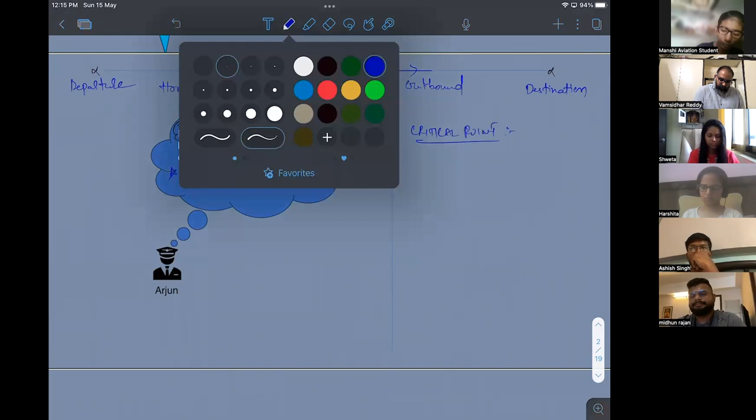So this Raghu gave him 2 documents to sign, one of them was about critical point. Let me explain what a critical point is. A critical point is a point between departure and destination. On the track, there will be a point - let's assume this is the point.

From here, if you continue your journey towards the destination, or if you decide to turn around and fly to your home or departure aerodrome, the time taken - let's say T1 and T2 - will be the same. So a critical point is a point on the track from which the time taken to go to the destination or departure will be the same, whether you go forward or backward. How many of you understood what a critical point is?

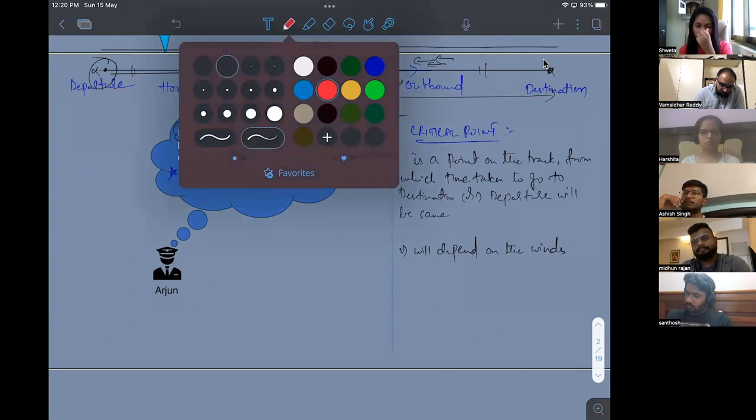So if I take here, let's assume the CP is here. If I assume CP is here, this is taking too much time, this is taking too less time. So CP cannot be on this side. So if I take CP here, this direction you are fast, but the distance is more. This direction you are slow because of headwinds, but the distance is less. So somewhere it will balance, and the CP is towards the destination.

How many of you understood this? Okay, here I have made a separate slide to make you understand this point, but most of you could answer this, but we will discuss it again. You may just note down.

CP is closer to destination if you are facing headwinds. Very good, guys, very good, you're doing excellent.

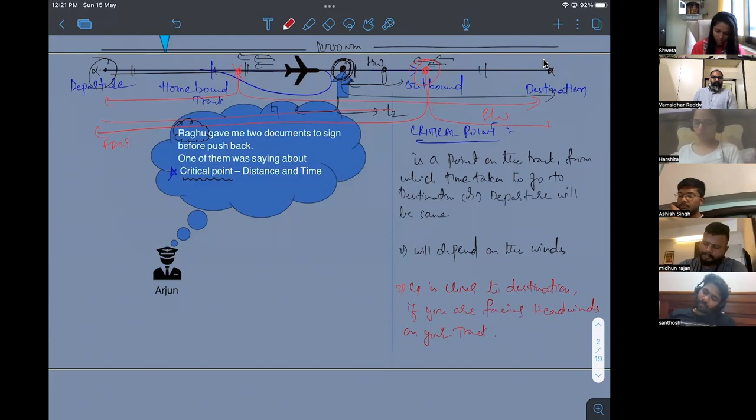Okay, now see, Raghu gave how many documents? Two documents. One document is CP. That means Raghu said, see here, if you are taking off from, let's say this is Chennai, correct? So after, let's say this is the CP. Let's say CP is at 600 nautical miles from Chennai.

That means he said here, if something happens like this, if you are before 600 nautical miles, you turn around, it will take less time to come to Chennai. But if you are beyond 600 nautical miles, you have to go and land in Colombo if you have to save time. Now tell me what happens if you are exactly at 600 nautical miles, where you have to go, whether you have to go to Chennai or Colombo.

Anyone? You can go anywhere. For example, your captain is having a heart attack, correct? Let's assume, yeah, Manshi, your voice is very slow. I mean, your internet connection is a problem. Be on mute. If you have anything, you please then unmute and ask.

Okay, fine. See, you can go anywhere. For example, in this case, let's assume Chennai has a hospital, but that hospital is very far from the airport, it is going to take a long time. But in Colombo, in your destination, the hospital is very near to the airport, correct? So if you are at 600 nautical miles, you decide to go to Colombo because of that other reason. Clear? It's up to you. Till here, any doubts you can ask me.

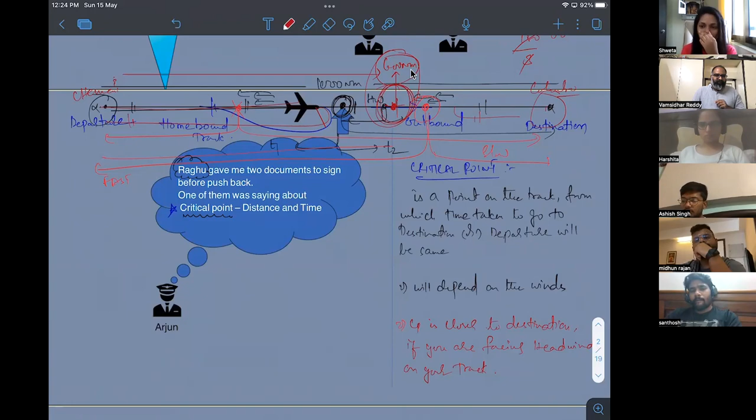See, let's assume this is your departure, or in this case, Chennai. This is your destination. I'll assume the total distance between departure and destination is capital D. Can I assume that? Okay, so there are winds today, I don't know how much. I'll assume my CP is here, critical point. Can I assume the distance between departure and the CP is small d? Now tell me, what is the distance between the CP and destination? Capital D minus small d. Very good.

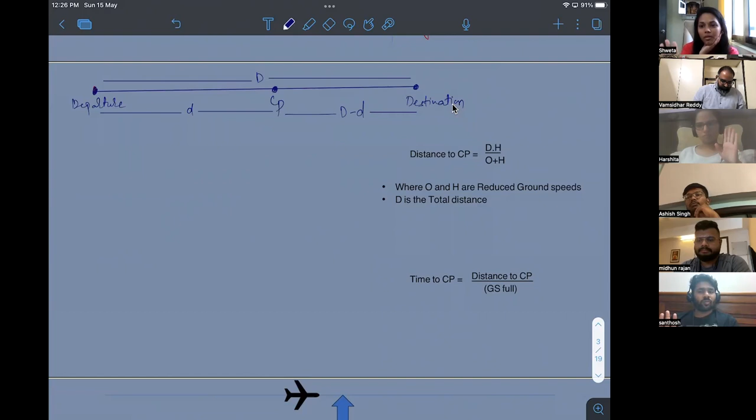Okay, now let me ask you one question. Think and answer. Guys who have attended instruments will answer anyway. Guys who have not attended instruments, you have to think and answer. How many of you know what is the difference between TAS and ground speed? How many of you don't know what is TAS and what is ground speed? Raise your hands. Okay, I'll go back. This is probably a new thing, because I have to explain what TAS is.

See, let's assume an aircraft is flying. It is flying from, let's say, Delhi to Hyderabad. Imagine there are no winds today, it means winds are calm. Now, as the aircraft moves forward, air molecules are being disturbed because of the wind blowing over the aircraft. Now, at some distance, there will be air molecules which are very much undisturbed because of the aircraft. Now, let's assume with respect to these air molecules, the aircraft is moving forward with, let's say, 100 knots, 100 nautical miles per hour. How many of you understood this?

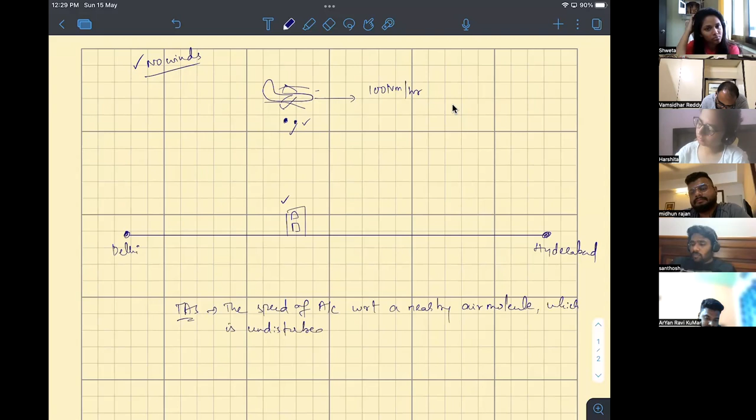Okay, now are these molecules moving today? No, because there are no winds, or nil winds. That means here, with respect to a building on the ground, what is the speed of the aircraft? 100 knots, or 100 nautical miles per hour. Because with respect to the building, these air molecules are not moving. How many of you understood till now? Okay, so TAS is nothing but the speed of the aircraft with respect to a nearby air molecule which is undisturbed due to aircraft movement. Am I clear on this? What is TAS?

Okay, now for example, today all the air is moving in the same direction as your aircraft with a speed of, let's say, 20 knots or 20 nautical miles per hour. That means, let's assume your TAS now is again 100 nautical miles per hour. That means with respect to this air molecule, your aircraft is moving forward with 100 nautical miles per hour. But all the air molecules are pushing you forward, or taking you forward, with a speed of 20 more nautical miles per hour. How many of you understood? Now tell me, with respect to this building on the ground, what is the speed of the aircraft? 120 nautical miles per hour. So in the first case scenario, when there were no winds, TAS was 100 nautical miles per hour. Now, in the first case itself, what was the ground speed? Equal to TAS, 100 nautical miles per hour. Very good. How many of you understood the nil wind scenario? TAS is equal to ground speed. Why? Because with respect to the ground, or a building on the ground, the air molecules are also stationary. Very simple.

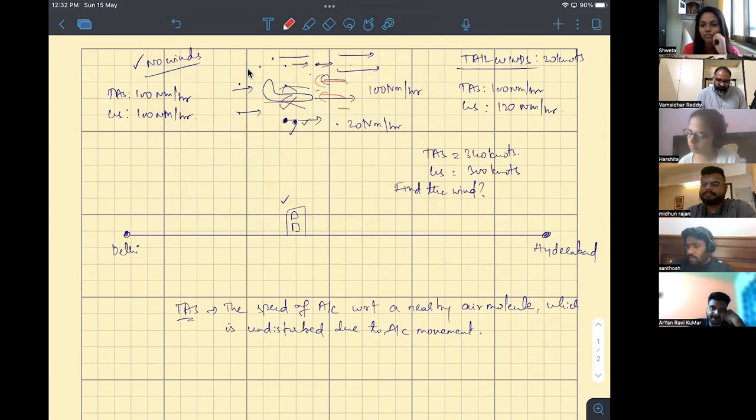Very good. You're trying to move forward, and the winds are trying to push you back. This is called headwind. So headwind of how much? 40 knots, because you're moving forward with 340, but the wind itself is taking you back with 40. That's why your ground speed was only 300.

Now listen carefully. Headwind will decrease your ground speed. So when I say today the winds are minus 20 knots, if you see this in the exam, you have to understand the wind speed is 20 knots and it is a headwind.

Understood? So headwinds are generally represented by minus, and tailwinds, let's say plus 30 knots. That means TAS is something and tailwinds are pushing you with an extra 30 knots, so your ground speed will increase. So tailwinds are generally represented by plus. Since DGCA question papers are sometimes copied from EASA or Oxford, they would have used this kind of symbols. So this is some kind of standard, to use minus for headwinds and plus for tailwinds.

Is this clear till now? Is there anyone in this room who doesn't know what TAS and ground speed are? Everybody understood? Okay.

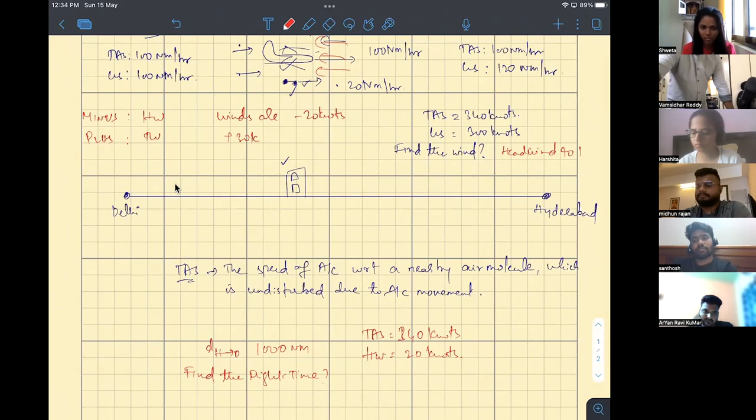3 hours, 7 minutes. I want exact answers. 3 hours, 7 minutes, 30 seconds. 3 hours, 7 minutes. So how did you calculate?

From ground speed. Okay, see, you're going from Hyderabad to Delhi, correct? Now let's say this is the ground. Here, when you are calculating time, are you traveling distance on ground, with respect to ground? Because from Hyderabad to Delhi, it is the ground distance you are covering. So that is the reason when you use distance equals speed into time, this speed is nothing but ground speed here.

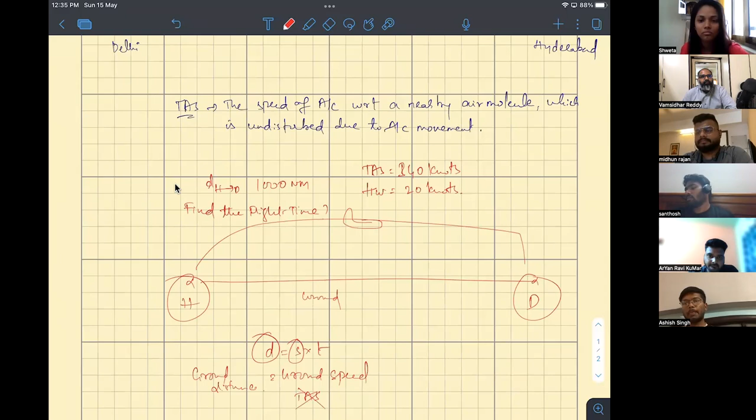Because you are inputting distance as ground distance, na? So never take TAS here unless they say nil winds. How many of you understood why you should not take TAS? Now when I teach instruments, I will teach you the same way.

There is TAS, there is indicated airspeed, there is calibrated airspeed, also called rectified airspeed. I'll teach what is equivalent airspeed. And any other airspeed here? CAS, TAS, IAS, EAS. That's all, na? So we will learn all these things in instruments. Today I have given you a taste of what is TAS and what is ground speed.

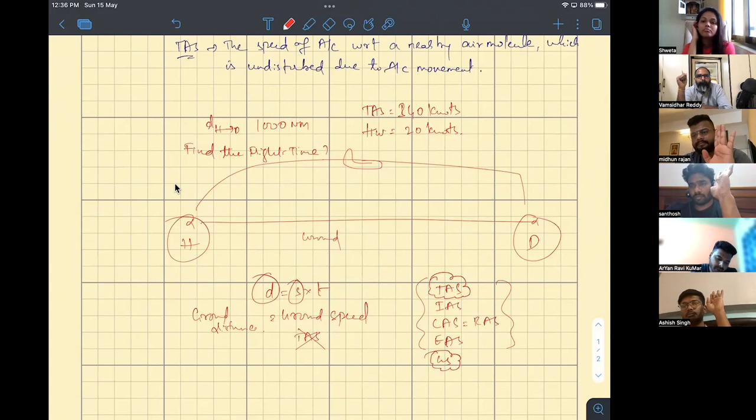How many of you are very clear of all the concepts till now? Shall I move forward? Good. Okay, now, see.

So, coming back, total distance between departure and destination is capital D. Your distance to CP I have taken as small d. So from CP to destination, it will be D minus d. Till here, everybody understood?

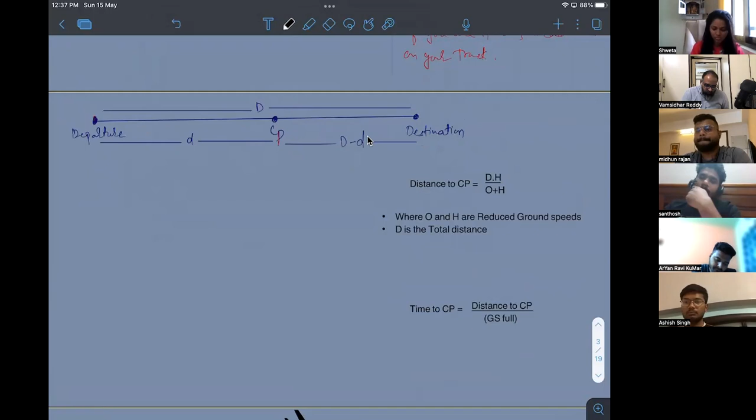Now, let's say my engine has, sorry, I have an emergency here. I have to land as soon as possible. I can go home or I can move forward to destination. So if I am at CP, the time to go back or go forward is the same. How many of you agree? That is the definition of CP. Now can I say T1 equals T2, time to go back?

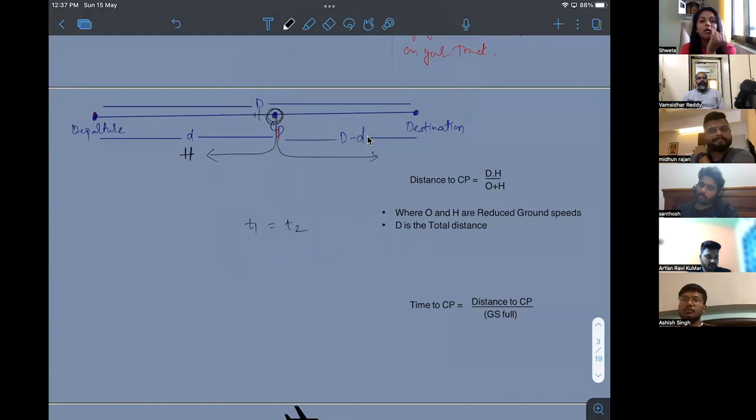Now see, the ground speed to go back, I'll represent this ground speed as H. H means home. How many of you understand? So H is ground speed home. I represent the speed of the aircraft with respect to ground, that is the ground speed of the aircraft when traveling to destination, or continuing like this, as O.

O is equals to outbound ground speed. This is called as homebound ground speed. Am I clear on this? O and H.

Correct. So T1 is equals to T2. What is the formula here? Distance is equals to speed by time. Correct? Speed into time.

Anybody doesn't know what is distance equal to speed into time? Raise your hands. No? Okay, distance equal to speed into time. Correct. Now what is time? Time is equal to distance by speed. How many of you understood it?

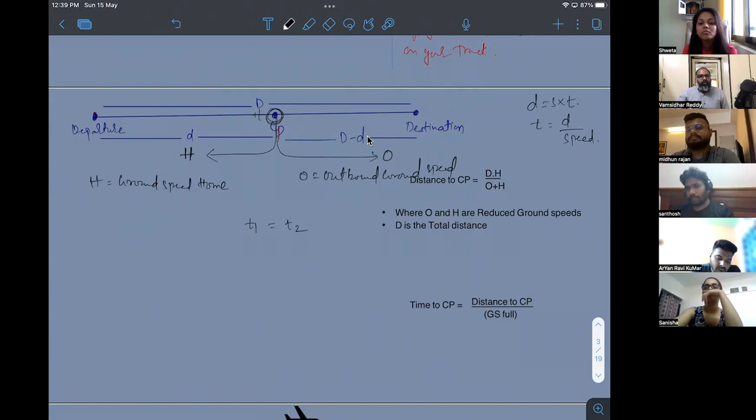Okay, now see. What is T1? D by H. Oh, there are two D's here, small d and capital D. Sir, small d by H. Correct. So this is the ground distance, small d, and this is your speed.

Okay, distance is equal to speed into time. So distance is small d, speed is homebound into T1, because I took this as T1 and this is T2. And T1 is equals to T2 because you are calculating from CP. So T1 is equals to small d by H.

Can I write small d by H here? Everybody? Yes, everybody. Fine. What is T2? Capital D minus small d by O. How many of you understood? Okay, so T2 is capital D minus small d by H.

H or O? Sir, O is said. So, clear? Now I'll solve this equation. Small d into O is equals to D into H minus small d into H.

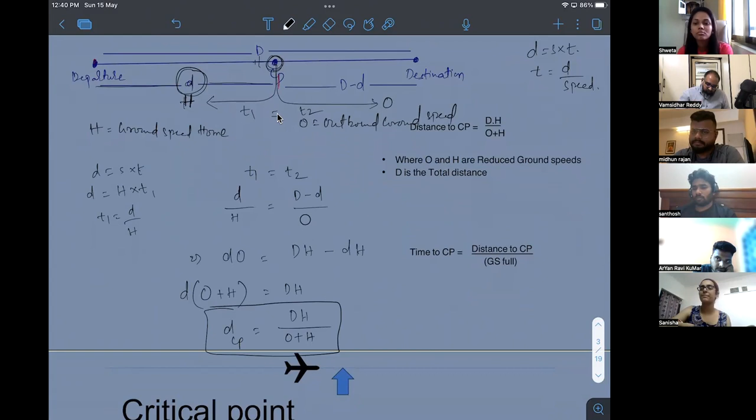Okay, now here, tell me, I was telling critical point from some time, correct? Tell me what is meant by critical. What is meant by critical?

Serious. Critical as in critical point from where you need to decide where to go. Who said serious? Sanisha, you said serious, no? Who said serious? Raise your hands. That means if I get angry, okay, you will say Vamshi sir is critical. Huh? Serious? What is this? Which school here? English teacher? I'll call her and say.

Fine. What is critical? See, critical means, for example, if you take my wife, she is a super specialist in critical care. She deals with patients on ventilators. She deals with every case where there can only be two outcomes. One, that case is going to expire, I mean the patient is going to die, or he or she gets relieved of the disease and goes home. For example, if you take a normal general medicine doctor, correct? So you go to his clinic, like everybody is going to go home, correct? Because it's an OPD clinic. But here it is like every case is critical. That means here there will be very less time to make sure the body doesn't go bad. Understood? So something which is very much related with time is given a name critical.

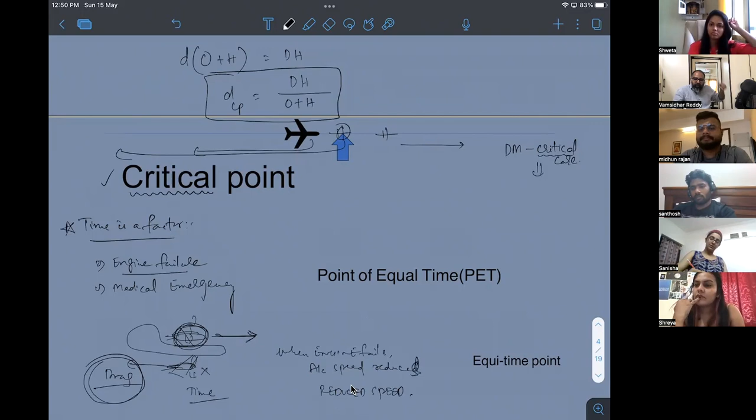Now see, I'm calculating the time taken to go to departure or destination. Not me, Raghu was calculating, he was the dispatcher, correct? So Raghu will assume here at this point, one engine is also going to fail.

So the pilot has to fly with only one engine. If two engine speed is, let's say 340, one engine speed would be around 280 knots. Now in this calculation, my engine has failed, I am going back home, or my engine has failed and I am going to destination. So when you are calculating CP, O and H, O comma H, which are ground speeds, outbound and homebound, these are reduced speeds.

So note down distance to CP. Solve this equation yourself, don't just see, note down DH by O plus H. Now in exam, do you have this much time to solve all this? No. From now on, even if I wake you up in sleep and ask distance to CP, DH by O plus H, O and H are reduced speeds, what is the distance between departure to destination? You have to memorize this, but you have to understand also.

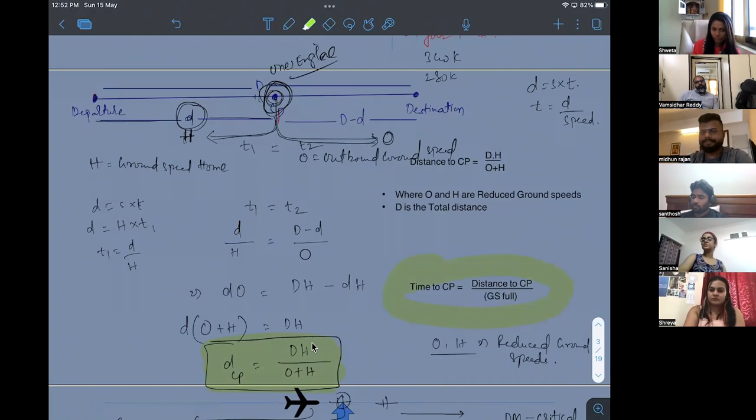Sir, can you explain the last line? When engine fails, outbound or homebound? Let's assume in the question they have given, which aircraft do you want to fly? Don't say Cessna, it has only one engine, if it fails you are going to land there. Which aircraft you want to fly? 737 or A380? A380, okay.

Let's assume A380 has a TAS of 400 knots. This TAS is produced if all engines are working, so this is 4 engine TAS. Now if there are nil winds, what is the ground speed? 400 knots, 4 engine. Yeah, so with 4 engines, it is 400 knots.

Now at a CP you have an emergency, your captain is also having a heart attack, and you want to go forward or back. Now your one engine fails. Let's say A380 with 3 engines will fly at only 350 knots. Now if there are nil winds, what is your ground speed? With 3 engines it's 350. Yeah, with 3 engines it is 350 knots.

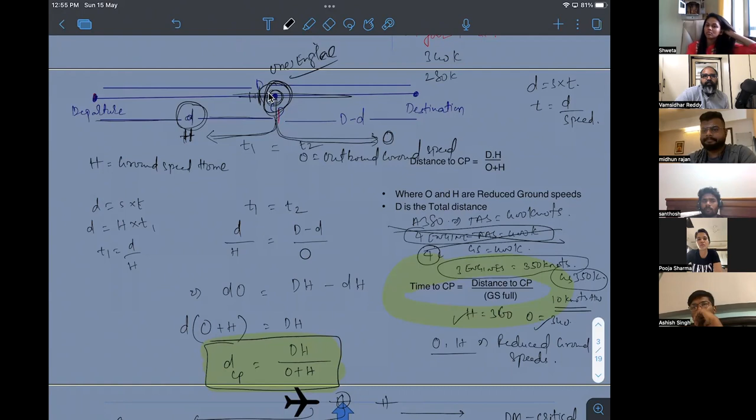No? Note it down, everyone.

Good. Now let's assume Raghu is sitting here.

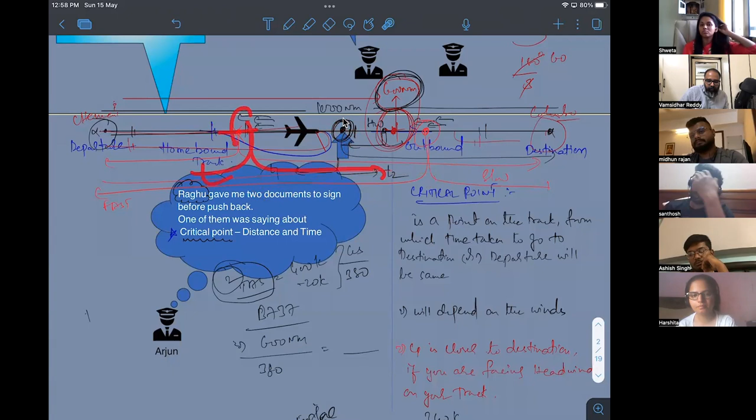See, you are still going to your CP, correct? Engine has not failed. You will assume engine fails once you reach your CP, or once you decide to come back or go forward because of an emergency. How many of you understood?

So that means while calculating time to CP, time to CP equals distance to CP by outbound speed, full ground speed. How many of you understood? Clear? Note down: time to CP is distance to CP by outbound full.

Okay, here there are other names also for CP. It is also called critical point, also called point of equal time. That means to go forward, also to go backwards, it will take equal time. That's why it is called point of equal time.

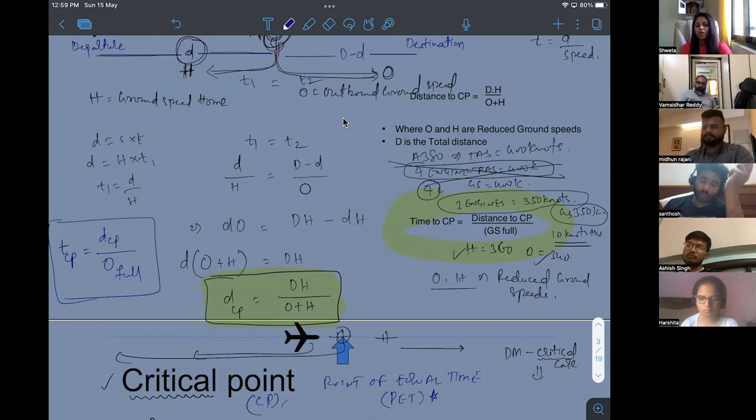From now on, I'll never call it critical point, I'll call it CP. Sometimes I use PET. In your exams also, you don't sometimes see CP, you see only PET. What is PET? Point of equitime, point of equal time. There is one more thing which you can rarely see in exams, that is equitime point.

All this means the same: critical point, CP, point of equal time, PET, or equitime point. Shall I move forward? Till now, any doubts you can ask.

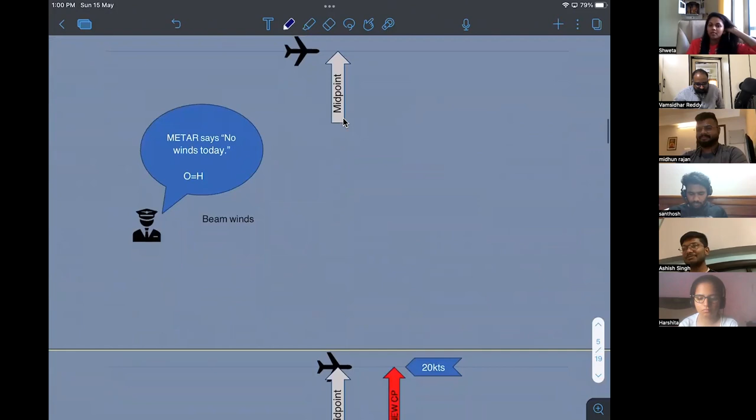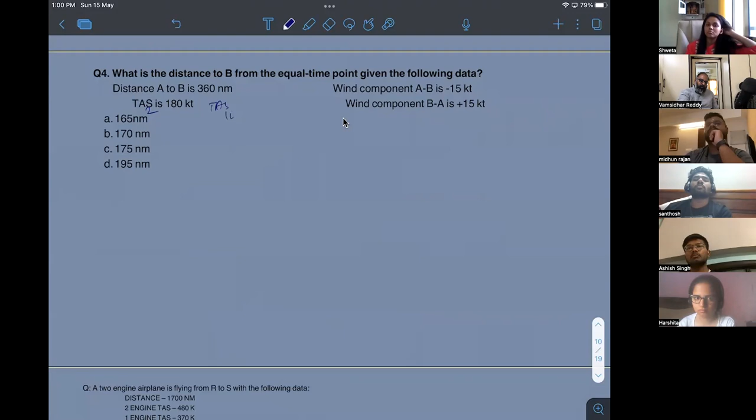Do this question. Okay, let me modify this question. This is TAS with 2 engines. If this is TAS with one engine failed, let's say this is single engine operating, let's say Boeing 737, that means one engine failed and only one single engine operating. Now TAS is like 150 knots. It is not a Boeing 737, TAS is very high for Boeing 737.

Your landing speeds are around 200. Let's say it's a small aircraft. Okay, now solve this question. You have 5 minutes.

How many students are there in class? Right? 1, 2, 3, 4, 5, 6. But officially we reached like 20 students on this batch. So 2 or 3 students will be joining from 2 or 3 days. Fine, I'll be back in 5 minutes. Until then, you calculate.

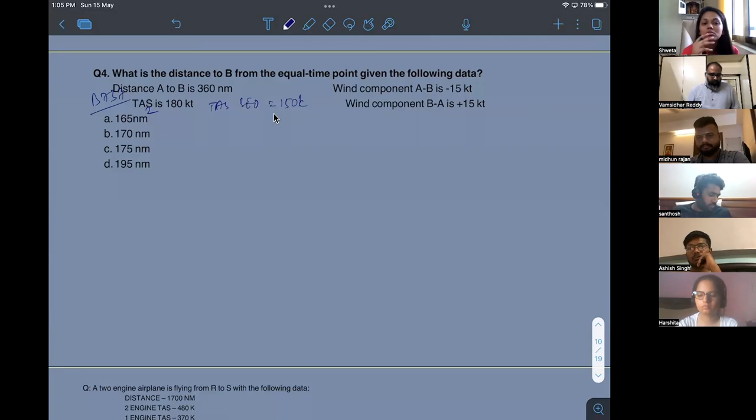Okay, because in exam I don't want you to confuse what is H, what is O. So always write down: you're going from A to B, correct? Write down where is A, where is B. That means A is your departure and B is your destination. Clear? Now the distance is 360 nautical miles.

360 nautical miles. Always write this down. Let's say this is your CP, put a dot for it. From here, if you're going home, this is your homebound speed; if going out, this is your outbound speed. Now, 2-engine TAS is 180, correct. 1-engine TAS is 150. So what is the formula for distance to CP?

DH by O plus H, where D is the total distance, which here is 360 nautical miles. What are O and H? They are reduced ground speeds. Outbound is... wait.

See, what is the TAS? TAS with 1 engine is what you have to consider now, which is 150. Your ground speed is TAS minus winds or TAS plus winds. If you're going outbound, let's calculate that first. Your TAS is 150, and the wind component A to B means you're going outbound. Is it headwind or tailwind? Headwind, minus. How much is it? 135.

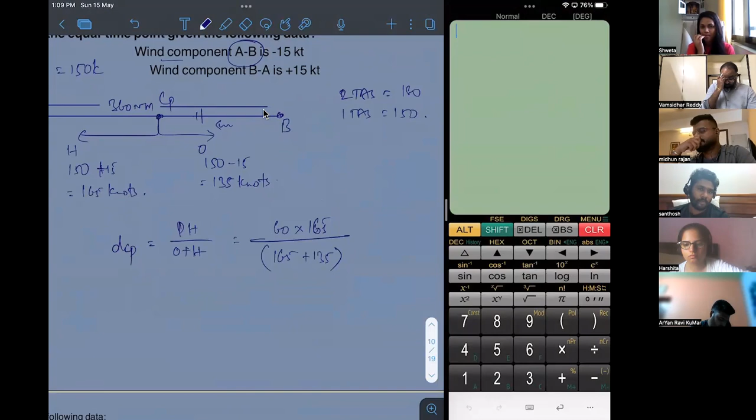This is how you have to enter this: calculate 60 into 165. Numerator 360 - wait, it's 360, correct? 360 into 165, okay clear?

165 is correct. No, actually it's like 135. No, H is 165, right? Now you are going home, correct? When you're going home, sorry, from B to A, it is tailwinds, H is 165.

So this is where the confusion happens sometimes - you enter O in place of H. That's why I want you to always write O for outbound, H for homebound, with 2 dashes like this. Clear? Shall I calculate this?

If you have to do this, 165 plus 135, then input all values and divide, it will take a lot of time. So I don't recommend it. Instead do 360 into 165 divided by - in the bottom there are 2 or 3 values, correct? So open a bracket always, add 165 plus 135, and close bracket. Everybody input the same value or same method into your calculator.

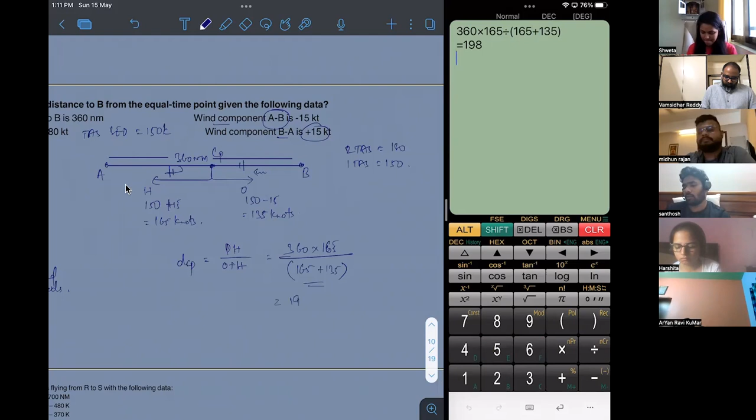How many of you got the same answer as I got? Raise your hands. Okay, everyone is raising their hand. How many did not get the same answer? Everybody got it? Good.

Now calculate time to CP. So, 1 hour 12 minutes. One hour 6 minutes - what is this? Two different answers: 1 hour 6 minutes, 1 hour 12 minutes. One is wrong, someone is wrong.

Ravi Kumar, how did you calculate? What is time to CP? Distance to CP by O full. Like I calculated, distance to CP is 198 nautical miles. What is O full? Is it full TAS with 2 engines? I'll kill you, I'll kill you with my pencil.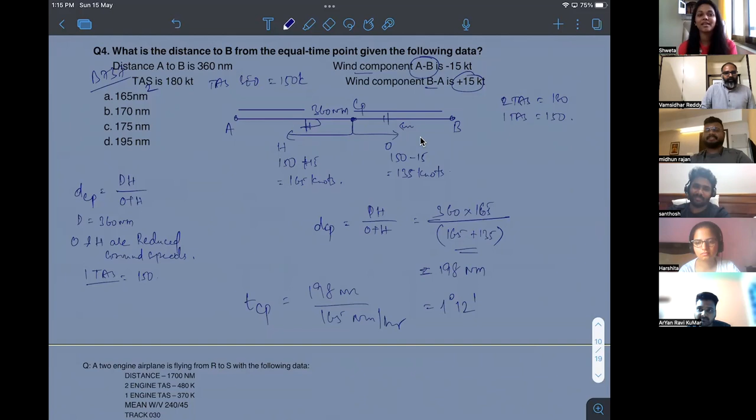So I was noting it down. Oh okay, please, I'm sharing. One second. Everyone.

How many of you know this song? No? It's a very good song here. Fine guys, come back here. Fast, oh always late. Anyway, until others come, we'll complete the song.

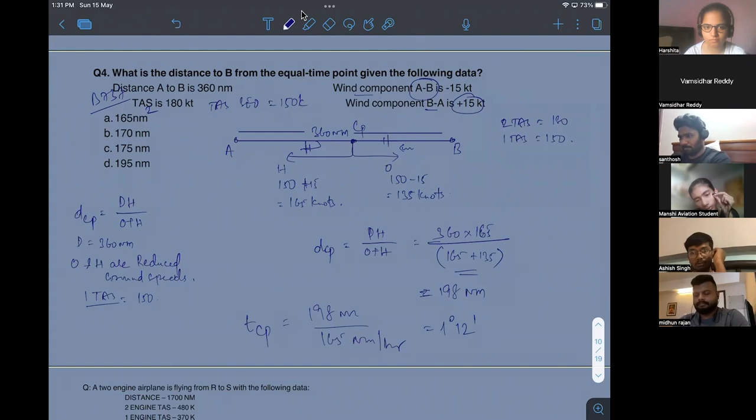Okay, so I said 1:30, correct? Now you just know how Raghu calculated, sitting on the ground, how much time it will take for the aircraft to reach the CP, and how much distance or where is the CP on the way. Clear? Shall we move forward with this discussion? Correct.

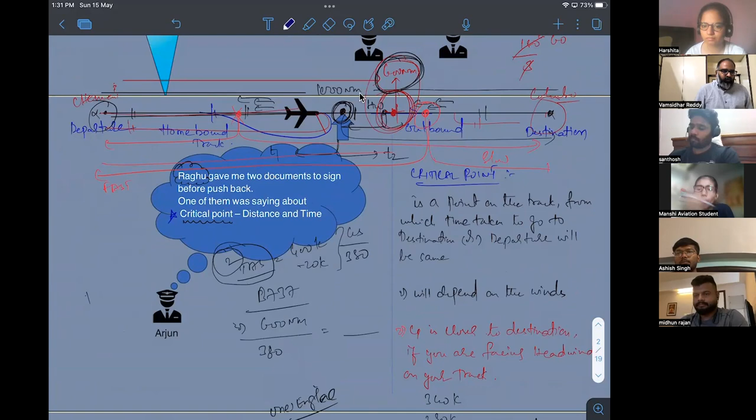Okay, see, on that day Raghu thought there are no winds. Okay, so he saw a METAR, correct? So Raghu is the dispatcher, correct? When he was calculating the DCP, distance to CP, the METAR said 0 winds. If there are no winds, where is the CP on this line? This is at the midpoint - yeah, departure, and this is the destination.

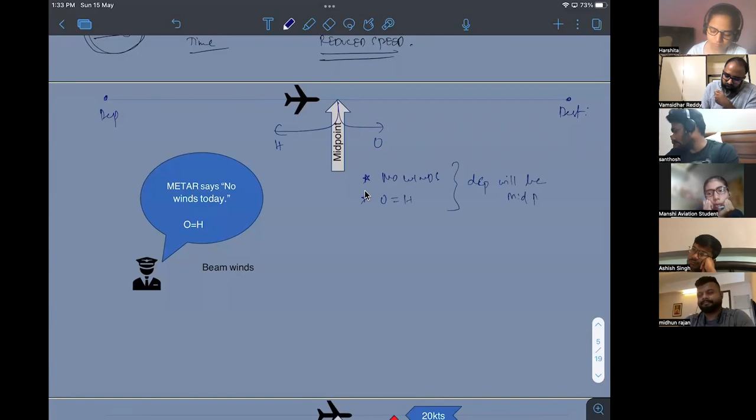So if there are no winds, why is it at the midpoint? Because your homebound speed and your outbound speed will be equal. That is nothing but your ground speed. Correct? Clear? So if they say no winds, or if they say O equals H, the distance to CP will be at the midpoint. How many of you understood this? Raise your hands.

What are beam winds? Crosswind, which are 90 degrees to the aircraft. So beam winds are nothing but if the winds are coming exactly from 90 degrees to the aircraft track or path. They can come like that, or they can come like this also from this direction. But they have to come from 90 degrees to the track.

Correct, so sometimes you see 'beam winds' or 'abeam winds' - both are same, no difference. Clear? Beam or abeam, the words are same.

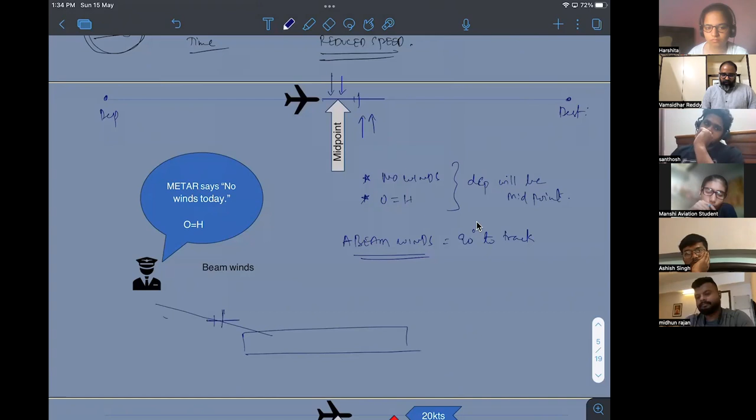Okay, tell me, is there any difference between beam winds and crosswinds? Yeah, there is a lot of difference. See, crosswinds are, for example, if you are trying to land on this runway, you will come like this. Now, if the wind is coming like this, one wind component is giving you a headwind, another component is giving you a crosswind. A crosswind is generally used for landings when the wind tries to push you out of the runway like this.

Okay, so here you don't use abeam winds because the wind is not exactly coming abeam to you. It is coming at an angle where one component is like a beam, and these are generally used for landings - this is a crosswind. But if you say beam or abeam, it means they are exactly 90 degrees to your track.

For example, if your track is, let's say, 045 degrees, tell me from where the abeam winds come. This is your track, your aircraft is flying 045, means from north. Okay, if this is north, you're flying on a track of 045. From where will the winds be abeam? What is meant by abeam winds? 135 - very good, 135 degrees.

So if the wind is coming from 135, that will be abeam winds. And this side also - 215... 315, sorry, 315. Clear. Very good.

Tell me, guess what happens to distance to CP in abeam winds? Winds are exactly coming, will it stay like that, sir? Will it stay at midpoint or will it move? At the midpoint only. Okay, so he says it will be at the midpoint.

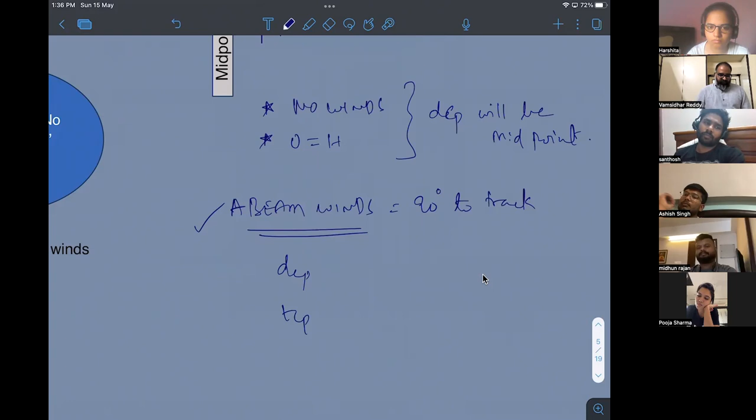Okay, that I understand. But how can you say the CP will lie at the same place, at the same midpoint? Why? But as we discussed earlier, CP will concern with only head and tail. Sir, we are maintaining the same track by crabbing into the winds.

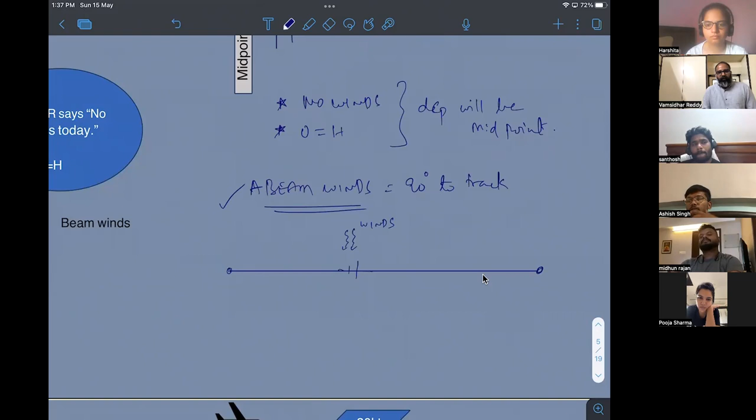I'll tell you. See, if you're flying like this, let's assume from here the wind is coming. These are abeam winds. Understood? Now what happens to the aircraft? If you maintain, let's say this track is going east, or the track is 090, correct? If you maintain your heading also 090, correct? That means your nose is exactly 090.

Because of this wind, your aircraft will be pushed sideways. So your final track will not be 090. Probably it will be 10 degrees to the right, so 100 degrees. How many of you understood why the aircraft is moving forward?

Now, here, see, if you're flying from Hyderabad to Delhi, you don't want to land in Kolkata. Correct? You want to go to Delhi only. What do you do? Instead of flying like this, you do something called crabbing into the winds.

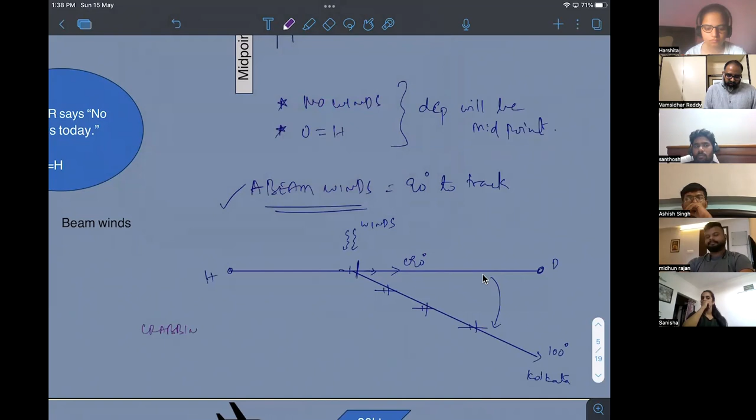Here, what is crabbing into winds? Instead of putting your nose like this at 090, you crab into the winds like this. If you don't do anything, you are drifting off by 10 degrees due to winds. Correct? Instead of putting 090 degrees, you put 080 degrees. That means you put your nose into the winds. Correct? So you're trying to fly like this, but the winds are pushing you like this. So ultimately, you will still be on the track.

Now, can someone say what is the disadvantage of this? See, your track is in this direction. Your aircraft is trying to move in this direction. Now the wind is coming like this and trying to stop you and push you towards the track. Correct. So that means your ground speed will be less.

How many of you understood why ground speed will be less? Raise hands. How many of you did not understand why ground speed is less? Ask. Anyone? Sir, once again. Okay.

Anil, if there are no winds, okay, the aircraft is moving forward with a TAS of, let's say, 100 knots. Clear? Now, what is the ground speed? 100 knots.

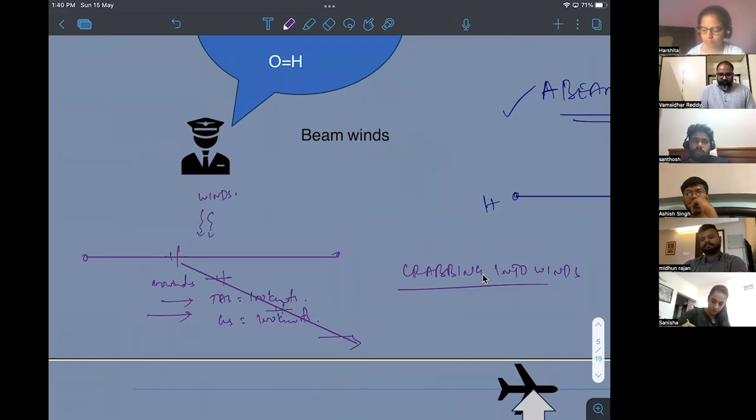Now, the winds are abeam. There are winds, correct? If they are, let's say, making your aircraft drift off like this, to prevent this drifting, you're crabbing into the winds. That means you put your nose like this. If the drift is, let's say, 15 degrees, you crab into the winds by 15 degrees. So you are trying to fly in this direction with a speed of 100 knots. Am I clear on it?

But what is happening? See, you're fighting with the winds and winds are pushing you like this. You're maintaining the track, but your speed is 100 knots in this direction only, not in this direction. In this direction it is probably 100 cos theta, cos 15 or sin 15, something like that. Understood? That means here your speed on the actual ground will decrease. Okay. How many of you understood this?

Here, everybody here attended CX3 class. Okay. Yes, sir. Okay, fine. First scenario, no winds, TAS is 100. How many of you agree?

Okay. So second scenario, your track is 090 degrees true. Your winds, here, where are the winds coming from? North, correct? So let's say it is 360. Winds are coming from north at 15 knots. Okay, your ground speed, you don't know.

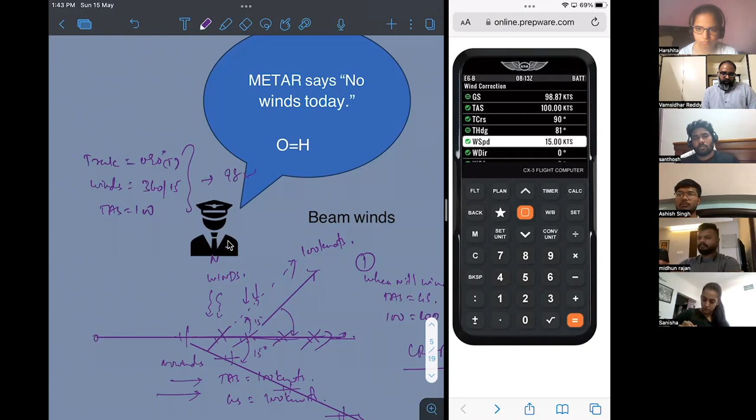The wind correction. So your TAS is 100. Now you are going on a true course of 090. The wind is coming from 360, the wind speed is 15. Wind direction is 0. Okay. So your ground speed is 98, so in this case, 98 nautical miles per hour.

How many of you understood this? That means, see, your ground speed from nil winds was 100, but now your ground speed has decreased because of beam winds. Till here it is clear.

Assume you're going from departure to destination. And if no winds, your CP was here. Now there are beam winds like this.

Now imagine something happened and you have to go back or forward. If you're going forward, you're doing this, agree? If you're going backwards also, see, because the winds are there, you're crabbing into the winds.

How many of you understood? So that means here your speed O is decreasing by something, H is decreasing by something, but both are decreasing equally. So that is the reason your CP will still be in the midpoint in abeam winds.

So in abeam winds, no winds and O equals H, CP will still be at midpoint.

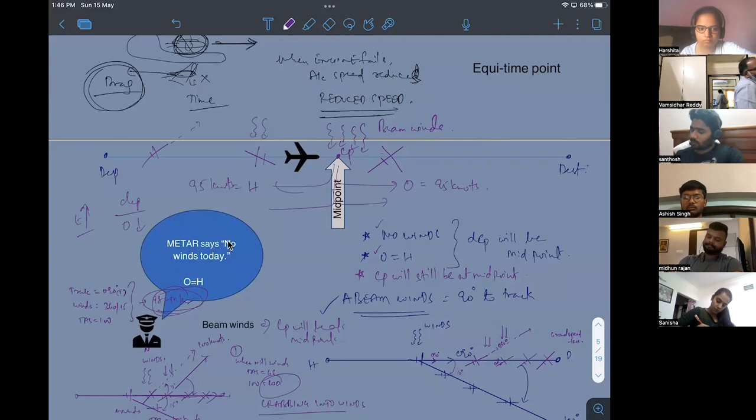It will increase because your ground speed is decreasing. Time to CP is nothing but distance to CP by outbound speed. So outbound speed is decreasing because you're crabbing into the winds, so time will increase. Right, so in beam winds, CP will be at the midpoint, but time to CP will increase.

Any doubts till now? I'm willing to explain it again. No doubts? You see, there is one paper - DGCA has around 9 or 10 question papers for navigation. There is one paper where CP PNR questions are very tough, around 15 questions in that same paper. And whenever students get that paper, they say sir it is very hard. So that's the reason I'm trying to push everything into your brain very carefully. If you have any doubt, if you don't understand a concept, please ask me now. Am I clear? So if you don't read or someone doesn't teach you with this clarity, and if that paper comes, you are going to fail.

Sir, you told beam and abeam are same, right? Yeah. Sometimes you are using abeam and beam, so I got a little confused, I wrote beam and I wrote A. Beam and abeam are same.

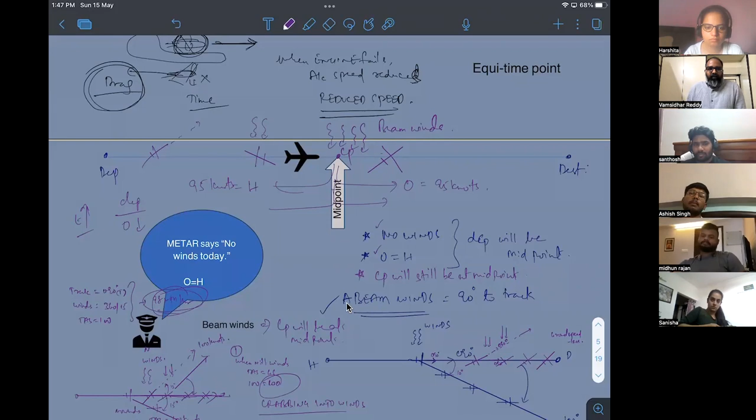What did you say? CP will be at midpoint and distance to CP will increase. Time to CP will increase. Time, yeah? Time is increasing.

So you're done with your sortie? No sir, I didn't have a sortie. They just called me to sign in some bond, I don't know.

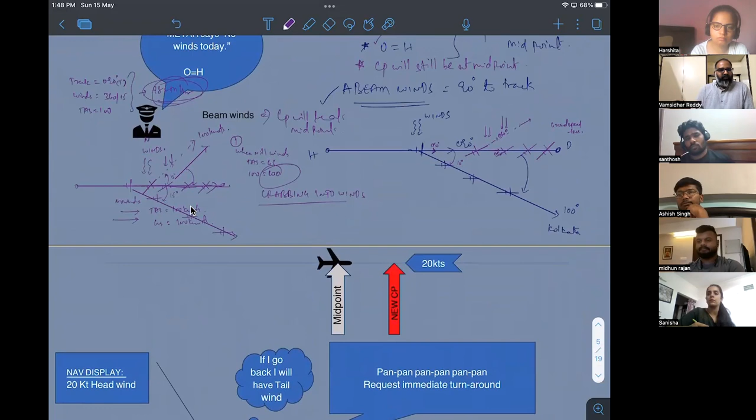Now, when he was discussing with Raghu, Raghu said there are no winds today sir, you enjoy. Aram se go and fly. But his navigation display on the cockpit is showing that I have 20 knots headwind now. So this is the midpoint. Now where is the new CP?

Is it here or is it here? Towards the red arrow, towards the right, destination. Can someone explain why? I want you guys to explain me why.

Your answer is correct. Sir, at the point of CP, we have equal time, T1 equals T2. When we get headwinds, time from our departure to our CP point, it may take more because speed is decreased now since we are getting headwind.

Good, time increases. So here, if you're turning back, you have a tailwind. If you're going forward, you have a headwind. So this time will be more when compared to this time - this time will be less, this time will be more. But our definition is time should be same. If you take here, in this direction, you are going fast, but your distance is more. So time to CP is distance by speed.

Your speed, but distance is more. Here, your distance is less, but speed is also less because of headwind, if you're going in this direction. So both ratios will be same and your CP will be here. New CP will be here.

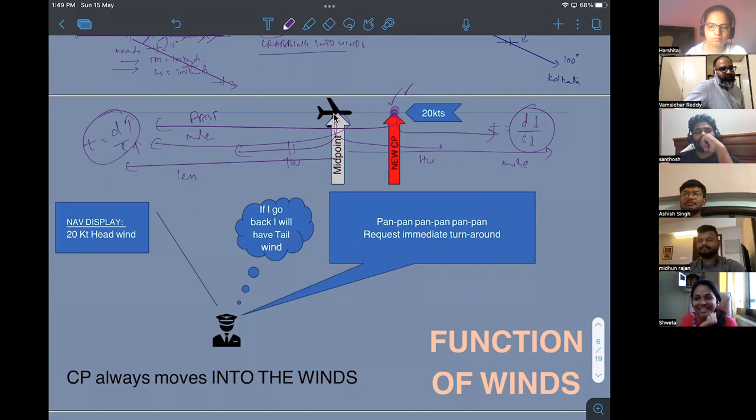To be frank, Arjun is my son, I created this story. Raghu is my best friend, I made him the dispatcher.

So I waited at the Chandigarh airport. A pilot really came out after 6 hours of waiting. I remember back then I was very financially tight. He said, I don't think you will be able to complete with the money you have, this will not be sufficient. He just gave me like 30 or 40 seconds, looked at this like that, and left.

That's the real story, but I believe you understood everything. I don't remember the pilot's name that day. Anyway, despite all that, I'm here. Story has a good ending here, if not, the story did not complete, story abhi baki hai. What was the movie name here? Om Shanti Om. So nice. This thing, clear? Mine, in this life only I'm doing it.

Fine, so he said on the RT, pan, request immediate turnaround, I'm coming back to Chennai. And you gave the pan. Clear? How many of you understood till now?

Now from this, can I say CP always moves into the wind? Yes, correct. So CP always moves into the winds.

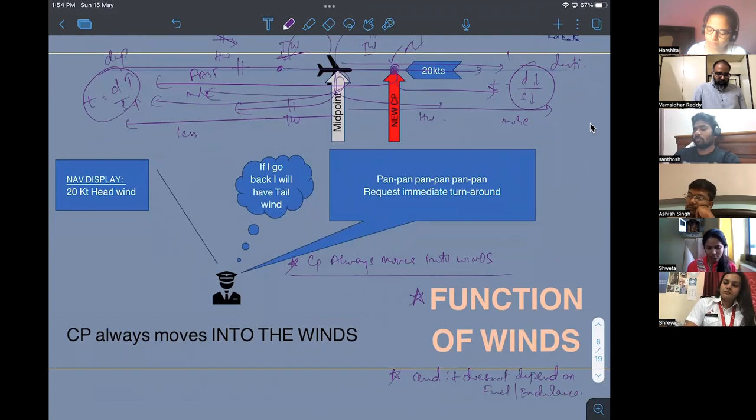Do this question. No, these concepts are beautiful here, I really love teaching these concepts.

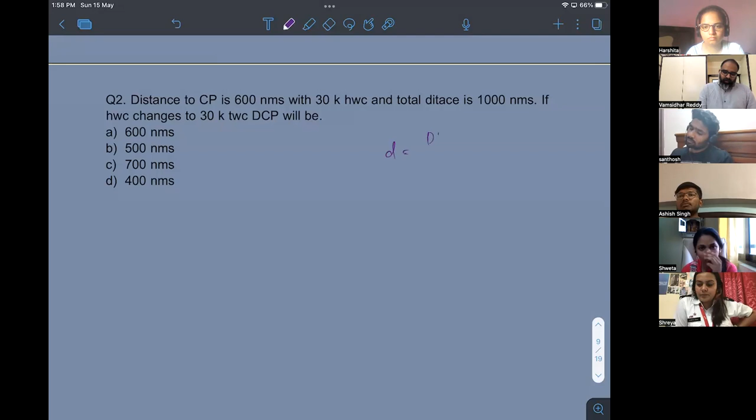Okay, we are not doing algebra, we are pilots, we don't know any mathematics, we don't want to know because what - we have this. Even in our exam they are allowing calculators. So we can equate both the equations and get a smaller ratio? No, see, it is a concept I just taught.

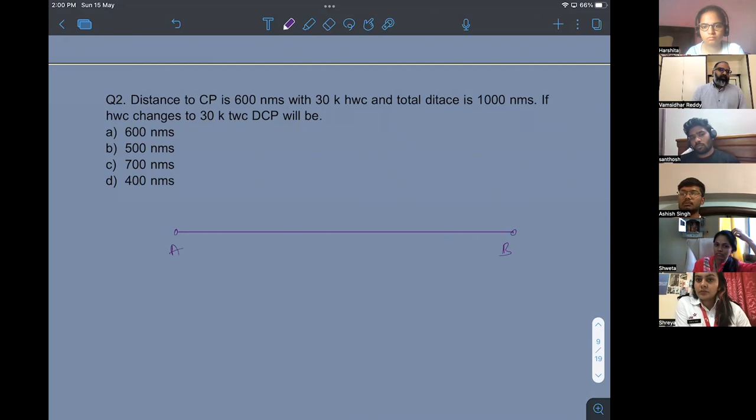Let's say I'm going from - let's say I want to go to Delhi, or let's say I'm going from A to B. Why complicate? If there are no winds, where is the CP? At the center, midpoint.

Now, they say you have 30 knots headwind. If you have headwind, will the CP move towards B or A? Towards B, correct. So in this case, the CP is at 600 nautical miles. So this is not the CP, this was the midpoint.

Understand? Now, I said CP always moves into the wind, correct? Because you have a headwind, CP is closer to B. Till here, everybody understood. Now, this headwind was 30 knots.

He said, if the headwind component changes to 30 knots tailwind component, understand? So forget the headwind. Now the wind is coming like this, same 30 knots. See, the CP will be on this side. Agree everyone? Correct. With this 30 knots, CP moved into the wind by 100 nautical miles because the midpoint is 500, since he gave total distance as 1000.

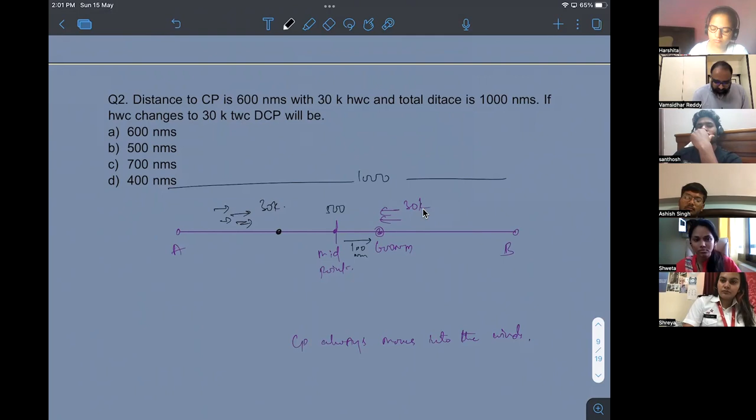Oof. We have pilots here, we don't know anything. Okay, sit in the aircraft, press autopilot, it will fly. Use less brains, good for health.

Am I clear on this? Excuse me, sir. Yes, sir. So what if they change the winds? Then too we'll have to do that calculation, no?

Yeah, see, this is a hypothetical question. This question was created just to show that yes, CP always moves into the wind. And note down, if tailwind changes to headwind or headwind changes to tailwind.

So that's why I kept arrows on both sides. CP will move to the other side of the midpoint by the same magnitude. Is this line understood? The explanation for this line is this whole question.

Am I clear on this? Shall I move forward? Note it down. Yes, sir. Sanisha is writing here.

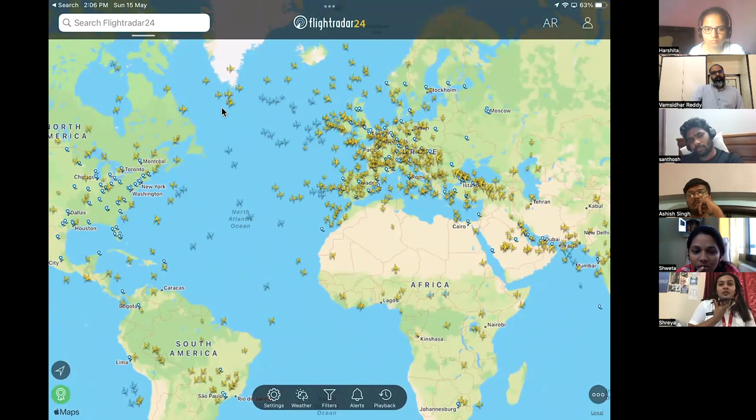See, this whole area is the Atlantic Ocean. This part is called the North Atlantic Ocean. Correct. So there are 2 very prominent cities. On this side, it is the US. On this side, it is London.

Now, when you're flying from London to North America, you're traveling westwards. When you're flying from North America to London, you're flying eastwards. This track is very important because there is no runway or proper communications when you're mid-Atlantic. The only communication you have is HF radio, which is not very powerful.

Nowadays, you are using SATCOMs. You know what a SATCOM is, correct? Probably in radio navigation, you will learn what a SATCOM is. Satellite communications. Okay.

A flight from US to London, at some point in time, this pilot who is now here probably doesn't have contact with either Toronto or with London. So he is 99% on his own. If he has to communicate, he has to use HF radio, which is not very good, and probably SATCOMs if he has them. Understood. So these are North Atlantic tracks.

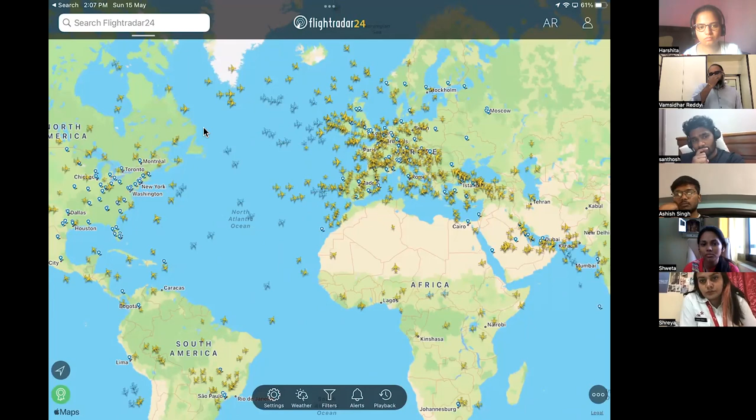These are the routes flown by very experienced pilots. When you're flying over North Atlantic tracks, I'll show you how the wind blows. These are live aircraft and live wind, correct?

So generally, what was that aircraft here? Boeing? No. 787, okay. Now where is it cruising, at what altitude? 39,000 feet, flight level 390.

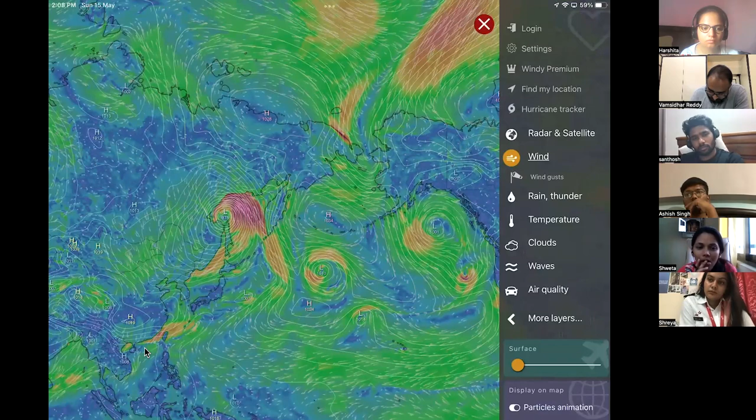Correct. Now let's see the winds at flight level 390. Okay, flight level 390, correct. Now, can you make out where North America and London are?

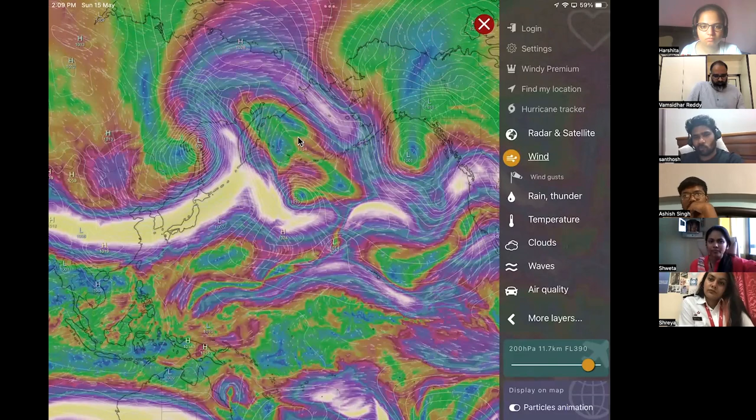Yeah, this is correct. See, what is the wind direction? So this is probably London. Okay, I'm not able to make out what is what. Okay, so this is US and this is London.

Okay, if we take to flight level 390. Now, what is the direction in which the winds are blowing? Normal direction - are they blowing from west or from east? Blowing from west, blowing from west. Now let's see what is the wind speed.

96 knots. A Cessna cannot land when the speed is 17 or 18 knots. Correct, when the crosswind is 18 knots, it cannot land. What is the speed of wind? 96 knots - here these are not normal winds.

These are called jet streams. I'll be discussing all these winds in detail. You will understand how they form, how they flow, how they are causing rain in India. Whatever rain we get, we are getting from this jet stream only, which is currently flowing there. In the monsoons, I'll discuss that in meteorology. So these are called jet streams. Jet streams generally flow from the west direction.

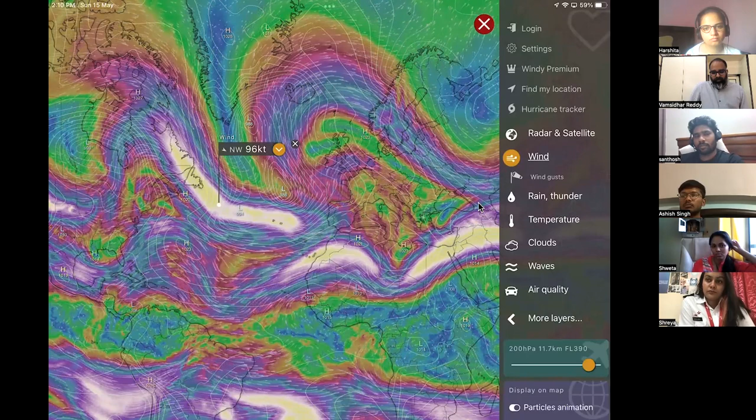Now coming to my question, see, this is North America. This is your London. So these tracks are called North Atlantic tracks. Now if you are cruising at flight level 390, or generally at the cruising level, the winds always come from the west. So these are called westerly winds.

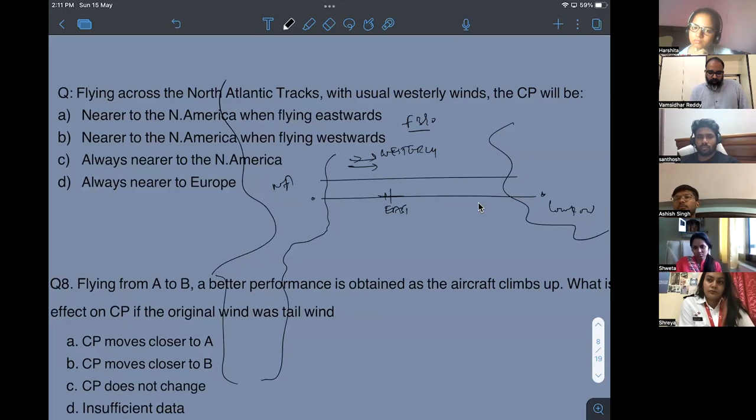Wind direction is always based on from where they come. Understood? So if your aircraft is flying like this, your aircraft is flying east, but the winds are blowing from the west direction. So these are given a name, westerly winds. The terminology is completely different, which I'll discuss entirely in meteorology in detail.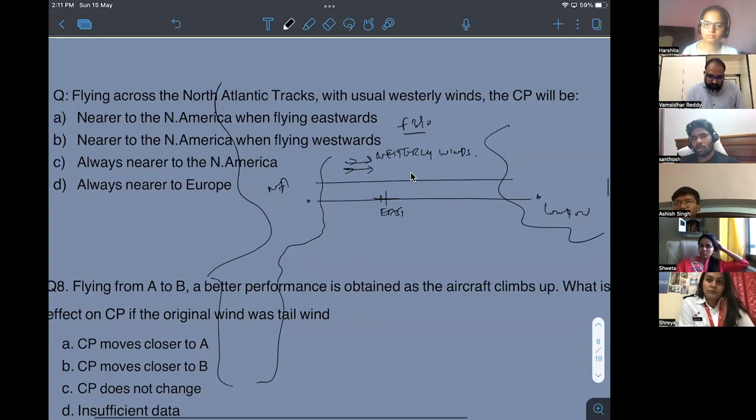Now let's say this is the midpoint. Okay, this is the midpoint. Tell me, where will be the CP? Towards North America, towards North America. Correct. Will it make a difference whether you're flying this direction or this direction?

We are flying easterly, correct. The thing is, whether you're flying from North America to London, CP is here because CP moves into the winds. Whether you're flying from London to North America, still CP is here because it moves into the winds from the midpoint. CP is only a function of winds - it does not matter whether you're flying from A to B or B to A. How many of you understood this?

So CP is always nearer to North America because usually, all around the year, winds are westerly in the North Atlantic tracks. Am I clear on this? Did you understand? Okay, I'm trying to mix this knowledge of navigation with meteorology.

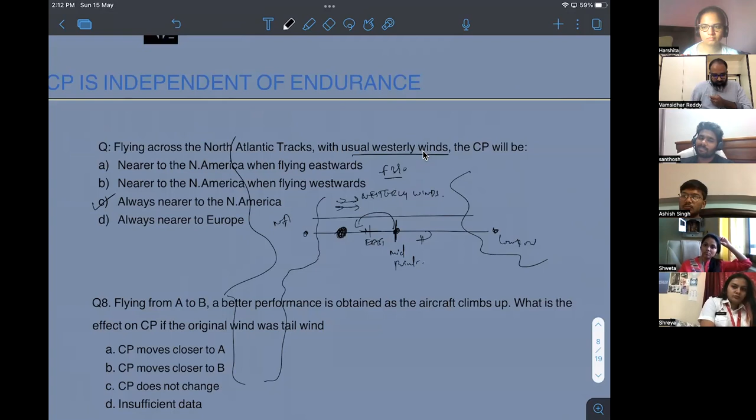Do you want to mix it with technical general also? Okay, so next question, this I am mixing with technical general. And next question I will mix with common sense. Wait for the next question. Answer once you understood this question. You answer this question please. Question number 8.

Your option delta is wrong. Insufficient - there is sufficient. It's alpha.

No. Sir, is my voice clear? If I'm moving here and there, I'm talking. Yes sir, yes sir, yes sir. Okay. Mic is stationary. Now, yes.

So B. What? B, correct. When A is not the answer and D I eliminated, it will change. So option is B, na? Option A. I said B is correct. Someone is saying option A.

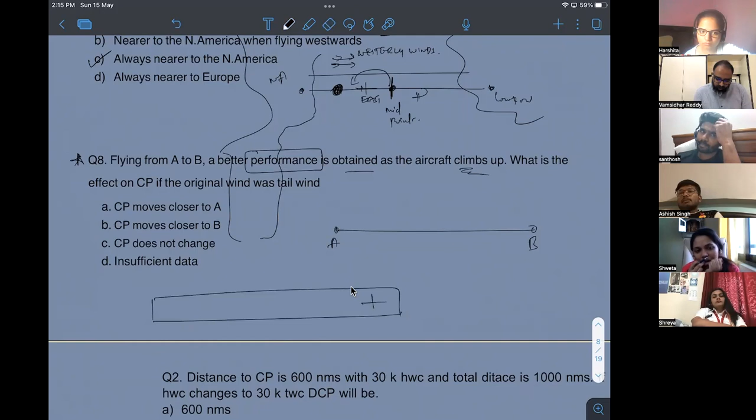Understand? Understand? Now see, I'll discuss takeoff first. If this is the aircraft, okay, so I'll take this direction. Okay, my aircraft is taking off like this. Let's say this is the wing of the aircraft, cross section of the wing.

Okay, as the aircraft moves forward, the wind should accelerate above and below, and it will create a pressure difference, and this will generate lift. How many of you understood? Okay, I'll explain this in detail in technical general classes, but this is the basic idea of how lift is generated.

Now if the aircraft is moving forward and the wind around the aircraft is also moving, because now the aircraft has tailwinds, correct? What happens to the effective wind flow on the wing? Will it increase or decrease? Increase. See, aircraft is trying to move forward, correct? So it is trying to make the wing go in this direction. Now, the wind is tailwind, so wind is trying to come in this direction.

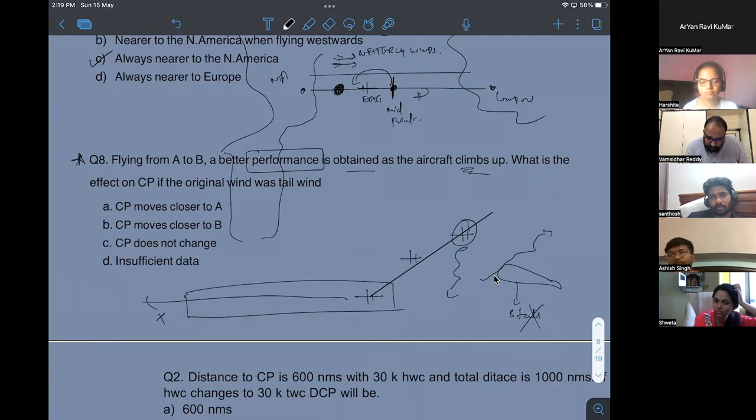Now see, if you are having headwinds, your lift is generated because the wind is flowing over your wing. Let's assume your landing speed which you have to maintain is 50 knots.

Now if you have a headwind, that means wind is coming with a speed of 10 knots. You can just maintain a TAS of 40, and the headwind coming at 10 knots will add up, so it will flow 40 plus 10, the speed of wind on your wing will be 50 knots. So it's not TAS, it is ground speed of 40. So you will touch down with a ground speed of 40, but the speed of wind on your wings is 50, so you're not stalling. How many of you understood this?

Okay, now for example you have a tailwind. You have to maintain wind over your wings of 50 knots, let's assume. Now you have a tailwind, that means wind is trying to push you with 10 knots more.

Now what is your landing speed, ground speed while landing? 60. Correct. You're moving with 50, and the tailwind of 10 knots is pushing, so 60 knots.

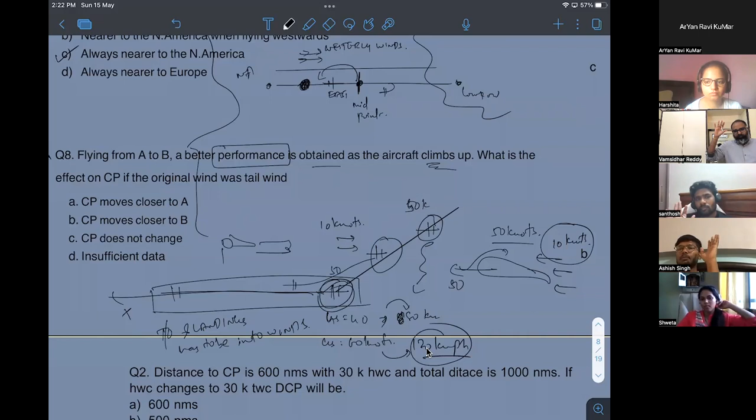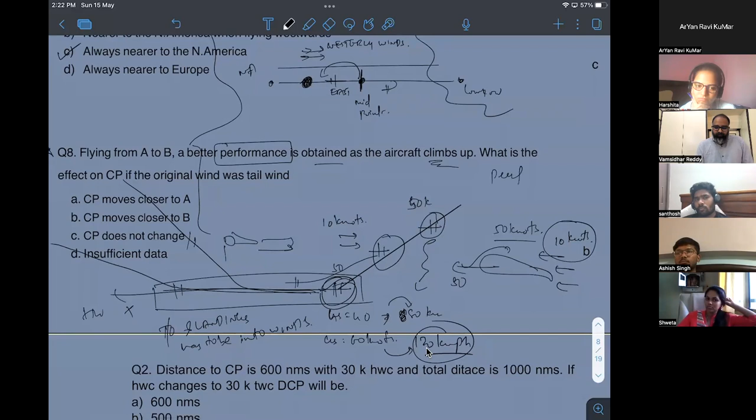That means, when you're taking off, if you have headwinds, you will easily take off and climb faster. If you have tailwinds, you will take off late and climb slower. So the performance of the aircraft will increase if you have headwinds. How many of you understood this? While taking off and landing.

But it is different while cruising. While cruising, you need tailwinds, correct? Why? Because it will push you along easily. So cruising needs tailwinds, and takeoff and landings need headwinds. Am I clear on this? Now read the question carefully.

You're flying from A to B. Let's assume this is A, this is B. Better performance is obtained when the aircraft climbs up, that means headwinds are more than you imagine. Better performance means more headwinds. So originally you thought from A to B it will be tailwind, but now performance is increased, that means you have headwinds. If CP was here, CP will move into wind. So new CP will be towards B, closer to B.

How many of you understood? This is combining navigation with technical general. No doubt. I'll ask you one last question and then I will take a break till tomorrow.

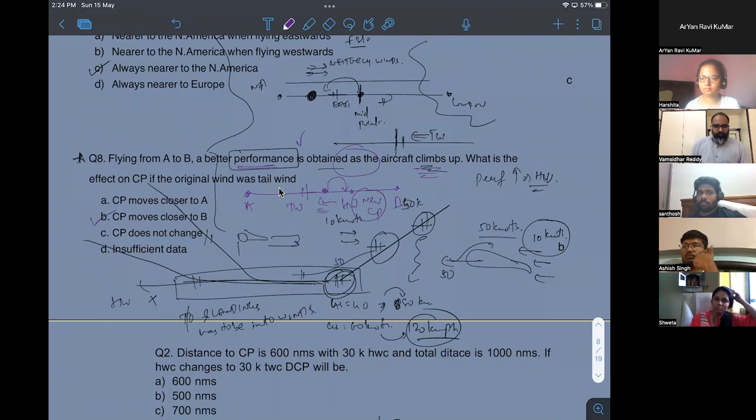Is everybody comfortable? Yes sir, very good. Who wants to participate in this next question? Raise your hands. I'll give the option to boys only. Boys raise your hands. No, girls raise your hands. Okay girls. Manchi, which airline do you want to work for?

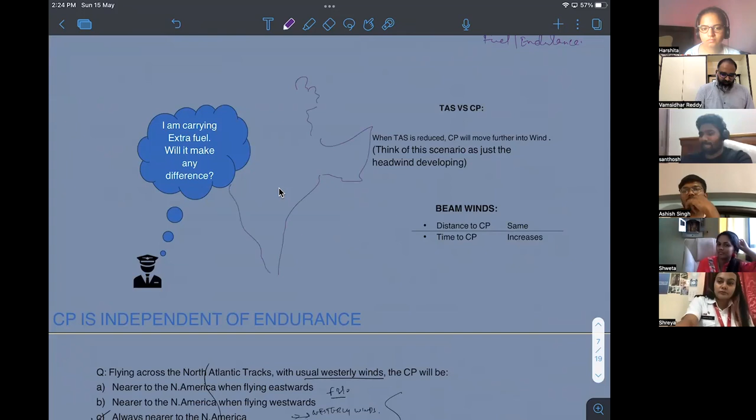Sir, Indigo. So from where to where do you want to do a flight today? Delhi to Chennai. This is Delhi, you're going to Chennai. You are at the midpoint. Now you have headwinds.

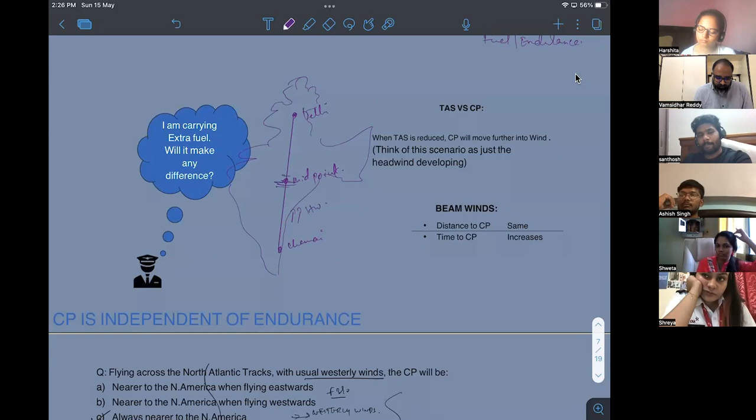You have a passenger with a heart attack. Now, will you go forward or will you land in Delhi? Sir, answer fast, where is my position? Midpoint, you are exactly at the midpoint. Sir, towards Chennai. You have a headwind here, if you go to Chennai it will take a long time, no? I'm not asking the position of CP, I'm asking whether you will go to Delhi or will you land in Chennai? Sir, Delhi, Delhi.

Everybody agree with her? Raise your hands. Boys, don't raise, giving clue. Don't raise, girls raise your hands. So how many of you agree girls have no common sense? See boys, agree? Imagine girls are not there and let's talk. Common sense नहीं होता है ना?

Here, when you have a heart attack, for example your captain is having a heart attack, do you think from midpoint you will go back to Delhi or will you just land in Hyderabad and take him to hospital? Vamsi, what is this here? See, critical point is only used when you don't have an alternate airport. That's why I said Chennai to Colombo, somewhere here, over water, you cannot land on water. There is no hospital on water. That's why I said North Atlantic tracks, going from London to, see, you land in Hyderabad. Note down: critical point is calculated only when you don't have an alternate airport.

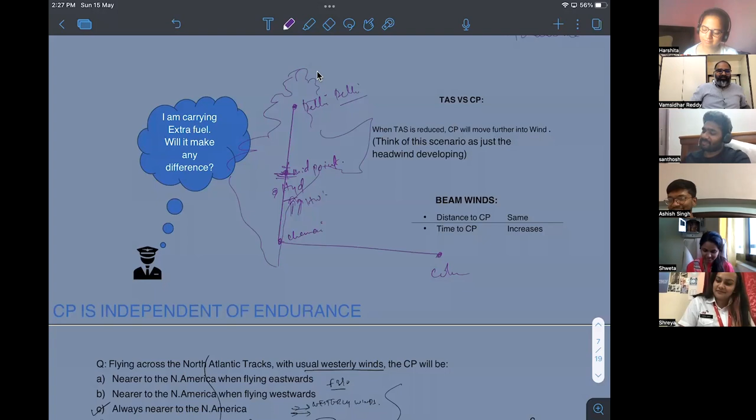Understood? So this is combining navigation with common sense. Got it? Fine. Any doubts you may ask? If not, I'm hungry, I did not have my breakfast yet. It's 2:30, no doubts?

I have a doubt, a small one. In the previous class we did a test in which there was a question about isobars of surface charts. You told us the option was QFE. Question number maybe 26 or 27. You told the answer was QFE, right? But sir, in Oxford the answer given is QFF, no? Yes sir, and I'll confirm this answer.

Okay, any other doubts? See, both are correct. We normally use QFE, but the more exact correct one is QFF. I'll solve this, okay, I have noted this down.

Any other doubts for today's class? No. Okay, fine. Take care, bye bye.

And how is Met going here? It's fine sir. I can see your expressions, I have like 2 big monitors. It's fine, fine sir. I'll see you guys when? Today, no Met class, do you want a doubt session for Met class? No sir, not today. Okay fine, tomorrow. Tomorrow come with a fresh brain, sir. Tomorrow I'll teach easy concepts and one concept which is very difficult. Our advantage would be I'll teach you something taught nowhere else, my own creations. See you tomorrow guys, thank you sir. Have a good day, sir. You too, guys, have a good day. Thank you sir, bye bye.